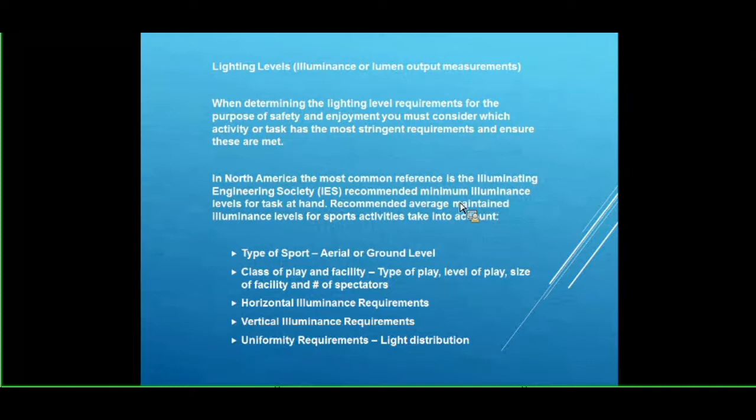My name is Steve Duff. I work with Conrad Lighting Solutions for the LAS initiative, and I am a lighting designer.

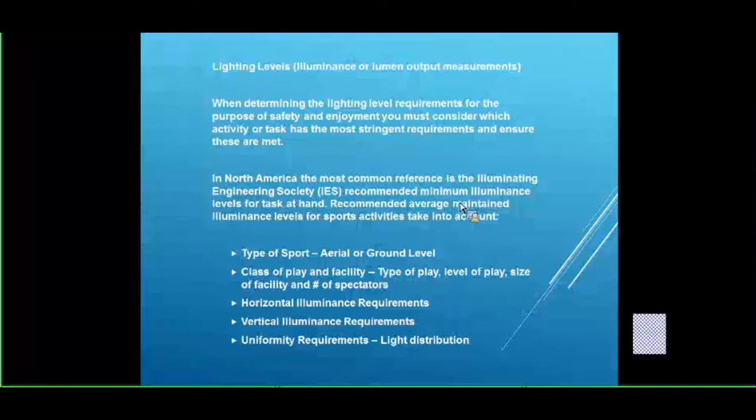What we do is design and optimize a lighting system to produce lighting levels appropriate for the task at hand. When we design light levels for the task, we look at the lighting level requirements, whether on the ground, at a certain height, or on a vertical surface, and determine if it meets the needs for safety and enjoyment required, ensuring stringent requirements are met by producing simulations ahead of time.

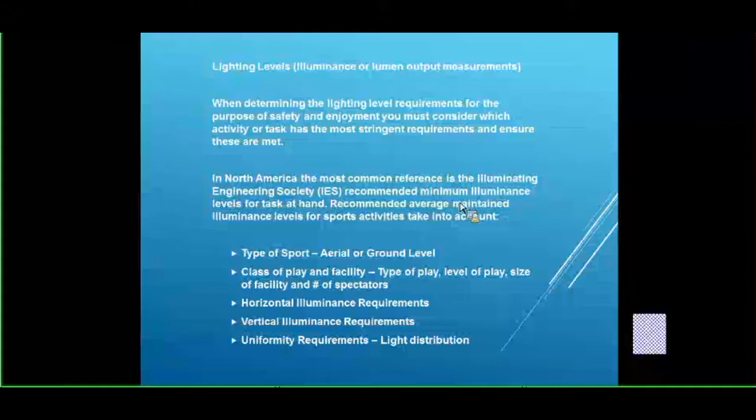When we look at standards for lighting, there are many different standards, but one of the most common references is the recommended minimum illuminance levels from the Illuminating Engineering Society. The IES produces documentation with recommendations for all sorts of different applications—it could be an arena, an office space, or a mine.

There are virtually thousands of different spaces that the IES has conducted studies on to determine the appropriate recommended levels. We work with you on a number of different facilities, as Scott talked about—fire halls, pools—but we're really going to concentrate today on sport and hockey.

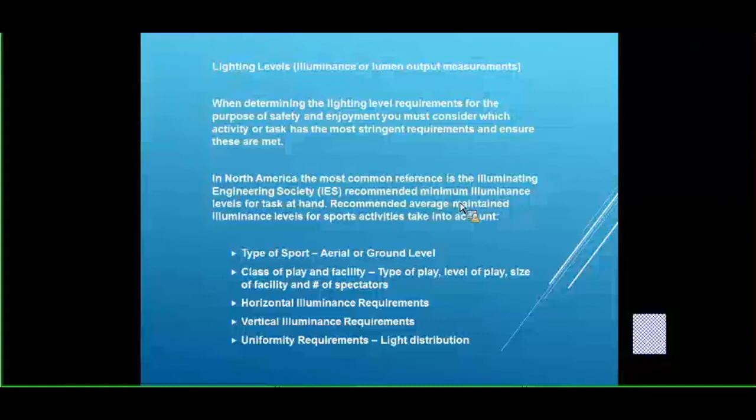When we look at sport, we have to see if it's an aerial or ground level type application. We look at the class of play and the facility—what is the type of play, the level of play, the size of the facility, and the number of spectators. We look at horizontal illuminance requirements, vertical illuminance, and uniformity requirements, light distribution.

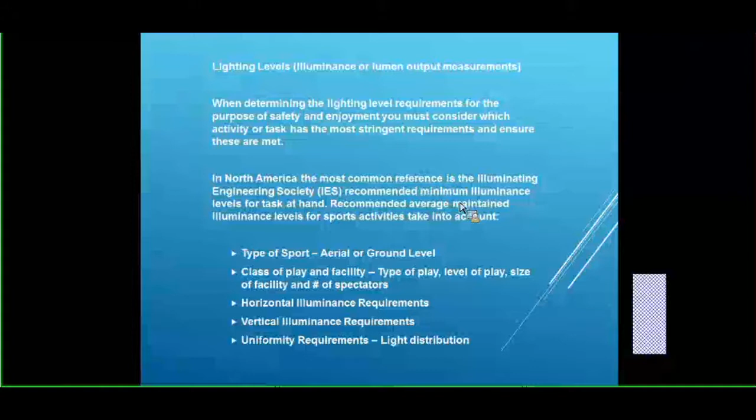That's very important, and we're going to get into that quite a bit, because in some applications the uniformity—the dark spots and light spots of the light produced—are not as critical as in other applications, and certainly in sport this is critical.

So for this discussion, we're going to review the process for hockey. Basically we are determining illuminance falling on the horizontal target, where the players are playing, and also the vertical targets—how are we seeing the players, how are we seeing the net, how are we seeing the board. Then we'll talk further about how we see the entire room, later on.

In photometry, illuminance is the total luminous flux incident on a surface per unit area. It's a measure of how much the incident light illuminates the surface, wavelength weighted by the luminosity function to correlate with human brightness perception. Essentially, that means the amount of light falling on a given area, and that's what we calculate.

In ice hockey, maintained illuminance targets, foot candles or lux, is the average in a given space. We're not looking at the light that is installed and what the levels are immediately—we're looking at light later on in the operating cycle. It could be 10,000, 20,000, or 50,000 hours, but what is the light giving you after time? Because we need to meet these levels over time, not just immediately, so we can meet the requirements of play.

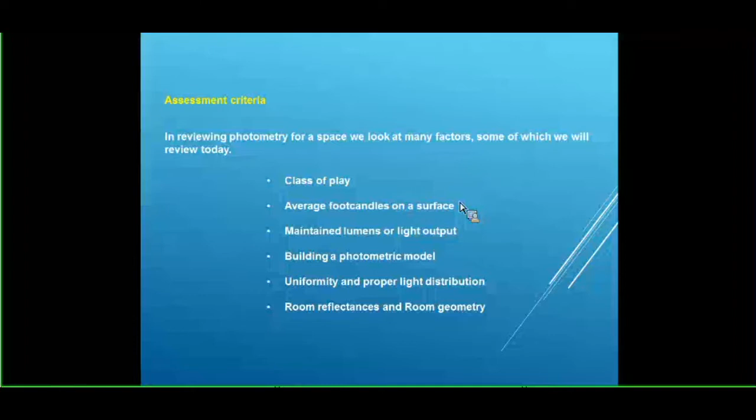In reviewing photometry, we look at many factors, and some we're going to review today. There are thousands of factors we review when designing a lighting system, but we'll cover class of play, average foot candles on a surface, maintained lumens or light output, building a photometric model, uniformity and proper light distribution, room reflectances, and room geometry.

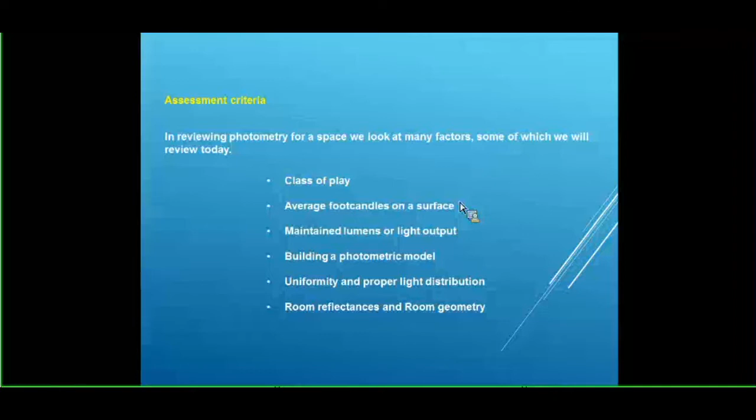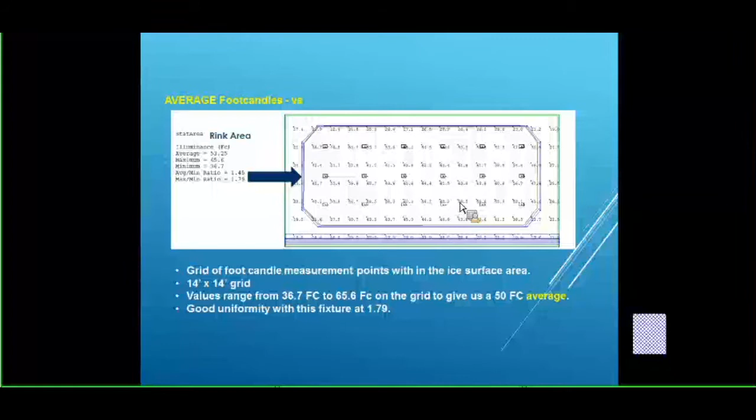So here you see the ice rink. Please ignore the top line foot candle values because it's actually hitting the boards and it's skewed incorrectly, but on the ice surface, underneath one fixture you have 65 foot candles, and under another fixture you have 36 foot candles. So if you measure under one point, 65 foot candles, it doesn't mean that you have a 50-foot candle average.

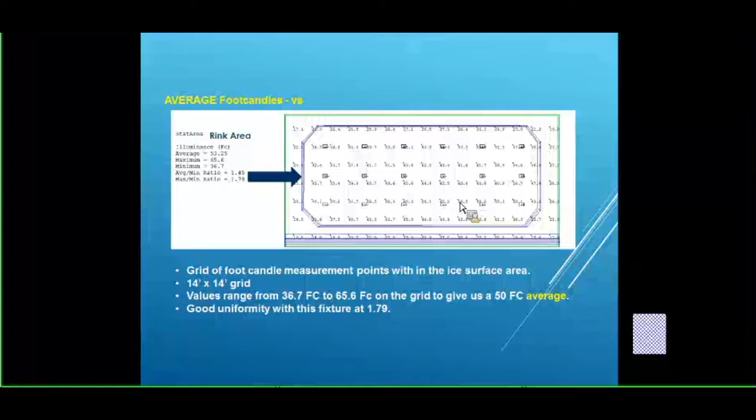That is recommended by the IES. So if someone is working with you and measuring one point to say, hey, I've got you 60 foot candles here, you need to ask, but what is my average over the entire rink? This is what we're designing to. This is why we look at the number of fixtures, the increased number of placements, and where we're putting the fixtures among multiple fixtures to produce this value.

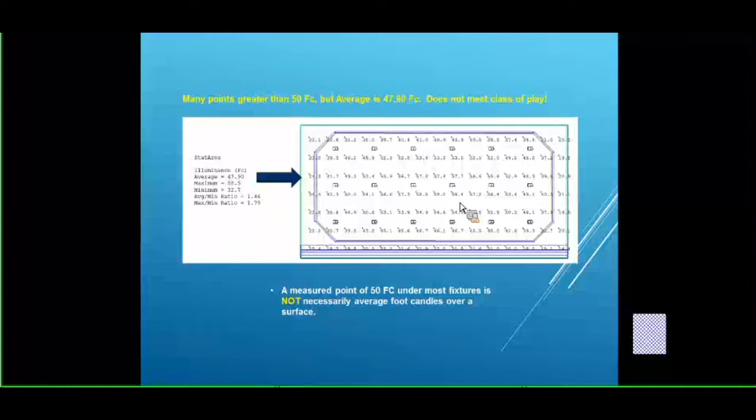Because if you look at this next chart, here we have measured points underneath the center fixtures. That gives you 58 foot candles. But if you look at the average of this particular system in this room that we created, it's only giving you 47.9 foot candles. So you just need to think about that when you're looking at and comparing systems.

Another subject we talked about was maintained lumens, or light output over time. So when we design to target 50-foot candles average, we design over time. We don't look at the lighting system and what it's going to produce when it's installed at the get-go. We look at it over time, depending on the system we're using, and bring in factors to calculate how the original lighting will deteriorate and target to that deteriorated value.

And what factors are we looking at? Dirt depreciation, the efficiency of the system, the lamp or LED depreciation. Lamps, LEDs, sometimes people say they're like rock stars. They never die, they just fade away. And that's the case with LED systems. Some systems deteriorate more rapidly than others.

So as an example, a metal halide system, your HID system, after 20,000 hours, you could have deterioration up to 50% of the original light value. And that's what you need to design to. When we design and look at a simulation of your current system, we're not looking at the light levels you get when you first put the lamps in. We look at the light levels you're going to get at 10, 15, 20,000 hours.

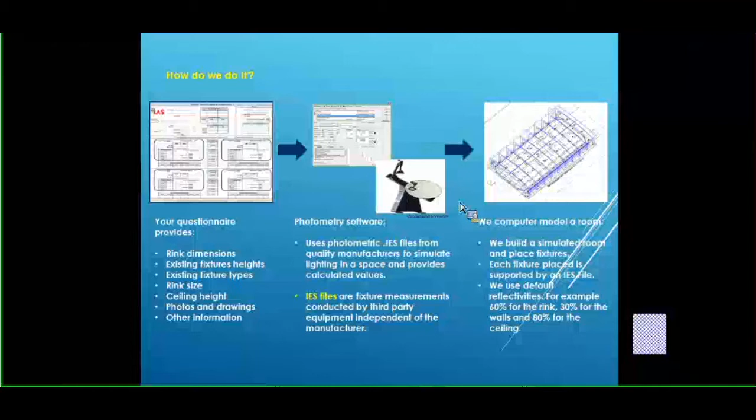Each quality fixture has something called an IES file, a .IES file. What that is, from quality manufacturers, is a way to simulate lighting in a space and provide calculated values for the fixture. The fixture itself is measured on a device you can see in the center screenshot, the lower right-hand corner, a gonio-photometer, which essentially places a fixture and takes measured values in a spherical rotation pattern to create a file that gives you values around different points of the actual fixture. These fixture measurements are conducted by third-party equipment, independent of the manufacturer in most cases.

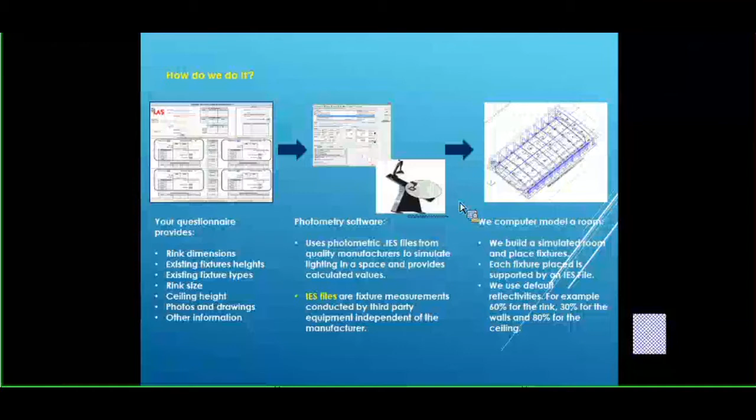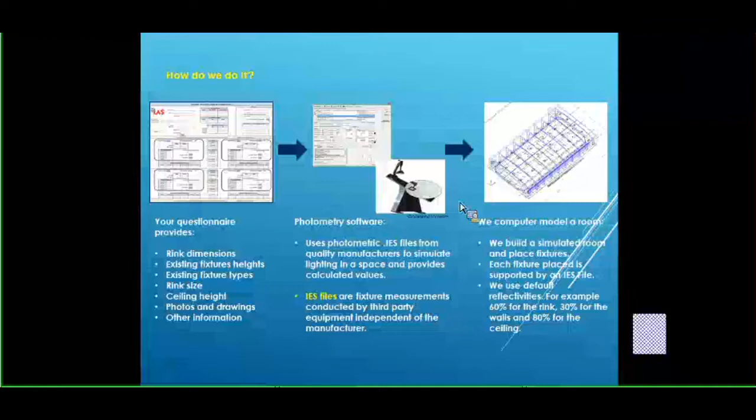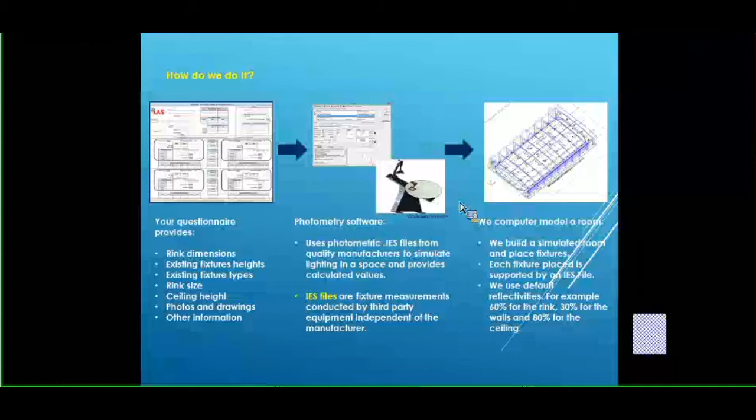So from these files, we computer model a room showing the height, the width of the room, the rink size, and then we start placing IES file supported fixtures into that room at the given height where the fixture is going to be. We then look at reflectivities of the room, and we use a default here because we have to have a standard. We'll talk about reflectivities, but we use a default of 60% for the rink, 30% for the walls, and a higher value for the ceiling because a lot of times ceilings have a reflective surface, so we use that value.

With photometry software and photometric values placed in that simulated room, it allows us to estimate the approximate light levels in an area of reference. For example, we simulate light levels with a typical HID fixture that you may have in your facility. We have a number of IES files on file that allow us to do that, and we take up to a 50% light loss factor to determine what your current lighting system is giving you. Yes, you may have changed your lamps two months ago and your lighting values may be significantly higher, but for the purposes of photometry and what your class of play lighting actually is, you've got to look deeper into the life cycle of the lamp.

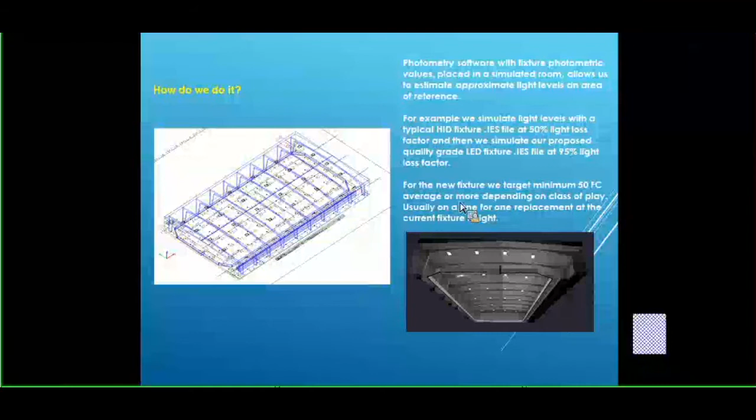Then we simulate our proposed quality grade LED fixture, as an example, with an IES file that may have a 95% light loss factor, or a different factor depending on the fixture we are looking at. For the new fixture, we target a minimum of 50 foot candles average or more, depending on class of play. Even before seeing your space, we can start building simulations of what the lighting will look like in render mode, and get calculations on that point-by-point grid over the surface area of the ice that we talked about before. So we talked as well about uniformity.

Uniformity targets are key for demanding visual tasks such as hockey, swimming, and maintenance areas. So here we have 3 different designs to show you an example. On the left, we have 18 1,000 watt metal halide lamps.

In the center, we have 18 narrow distribution LED fixtures with no lens. These lower grade fixtures have an L70 lumen maintenance, so over let's say 50,000 hours, it might have 70% of its original light output from the fixture. And then on the right hand, we have 18 wide distribution LED system fixtures with a lens, L95.

So let's look at the values below. On the HID metal halide system on the left, we get average foot candles, in this case 60.55 at L50. It could be anything, this is just what we simulated. We have a min-max of 43 to 72 foot candles, which is a uniformity of 1.4. That's pretty good, there's no reason why you can't have a good uniform HID system, especially when you have more placements. And the wattage is 19 kilowatts, quite high to operate your system.

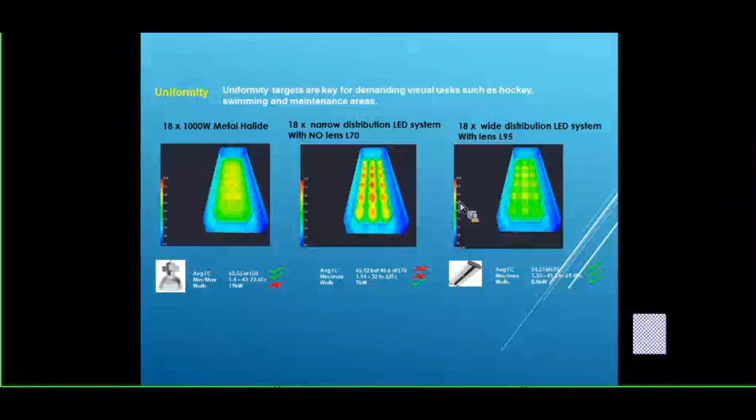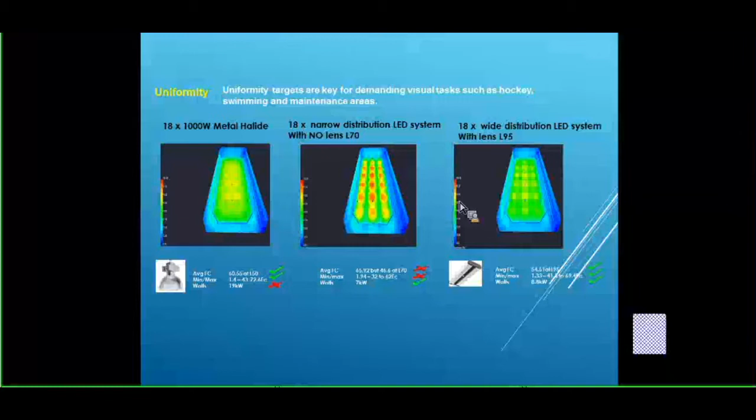The center ice that we're looking at, I don't like to use the word cave, but that's sometimes how people refer to it, is that it's a cave effect. And in the case of the wide distribution, the aisles are lit up nicer, more even distribution. And while the wattage savings in this case is not as great, you're still saving a significant amount of wattage, and you have much more satisfied customers at the end of the day.

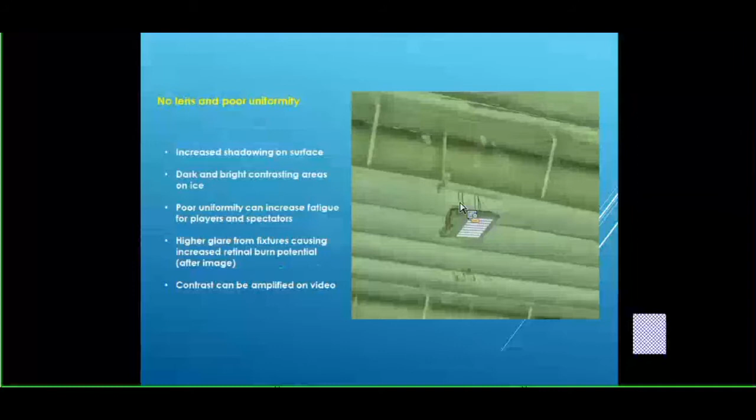So you got to be very careful when you're looking at different fixtures. If you're not using correct optics on the fixture, you can increase your shadowing on the surface. You can have dark and bright contrasting areas on the ice. When you have poor uniformity on the ice, a lot of light and dark, it can increase fatigue for players, and also for spectators, when they're looking at the sport, they can experience increased fatigue.

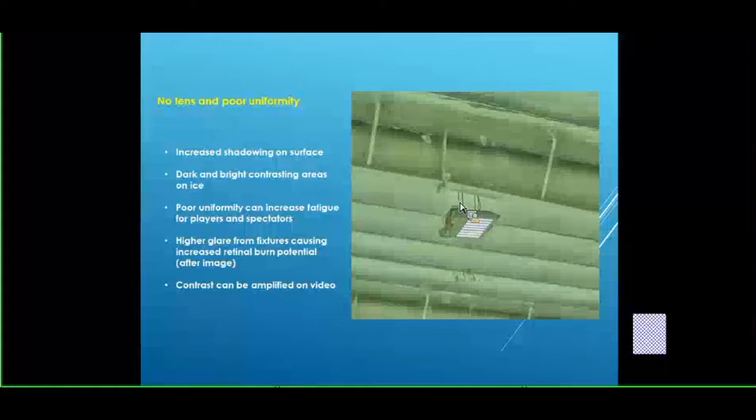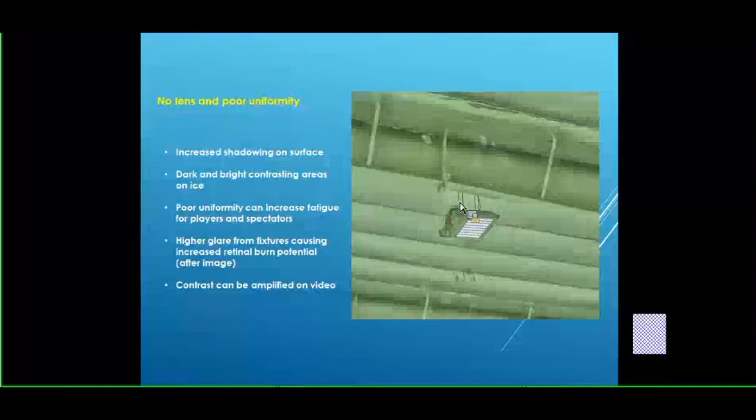And when you don't have good optics and lensing on your fixtures, when you look up at the fixture, it can increase the potential for retinal burn, essentially an after image. And those contrasts can certainly be amplified under video and television.

So some other things that we want to consider in photometry in our design. We've laid out the different fixtures in our room, and this is where we really need to eventually get into your facility and really look at the attributes of the space. The room cavity is critical.

So if you look at the top line on the left-hand side, here we have a space, equal width and length, that has a ceiling that is flat over the fixture placements that are at a particular height. So with the flat ceiling, with the light coming down, even though it's coming down, that light's bouncing all over the place. And then it eventually hits the ceiling, and that ceiling is closer to the ice surface than another design, and that also lends itself to the light on the surface play area.

So let's say we take that same system, and with it we put over it a vaulted ceiling. That light now that's reflected off the ice surface going back up to the ceiling has further to travel to then come back down to the ice. And what happens when you have that vaulted ceiling? You have a lower foot candle average. In this particular case, with the same fixture, left screen to right screen, with just a vaulted ceiling, our simulation gave us 12 less foot candles. So it's something to consider when you're designing your space.

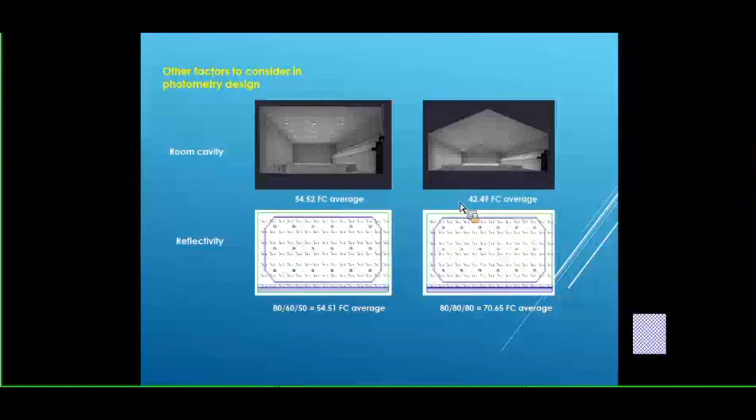Same fixtures and same room geometry, same everything, but different colors. Here we simulated very high reflective surfaces of 80, 80, 80 throughout. And look at what that does to the foot candle average for your space.

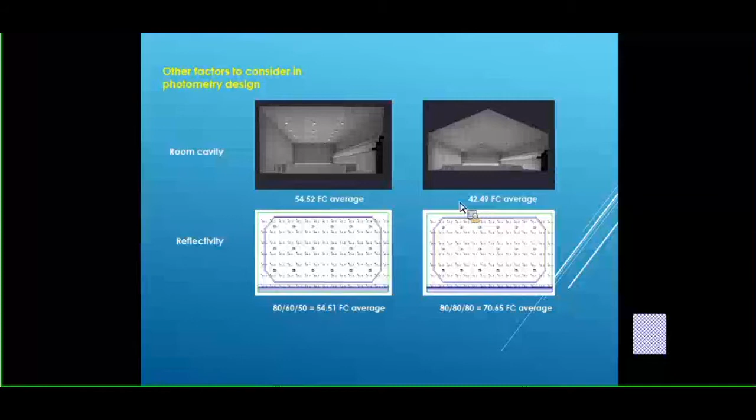So here we talked about what we can do just from a questionnaire and some photos and drawings that were provided.

When we're able to work with you to work out an arrangement to come and visit your site, there's a lot more information that we look at to fine-tune the results in the design.

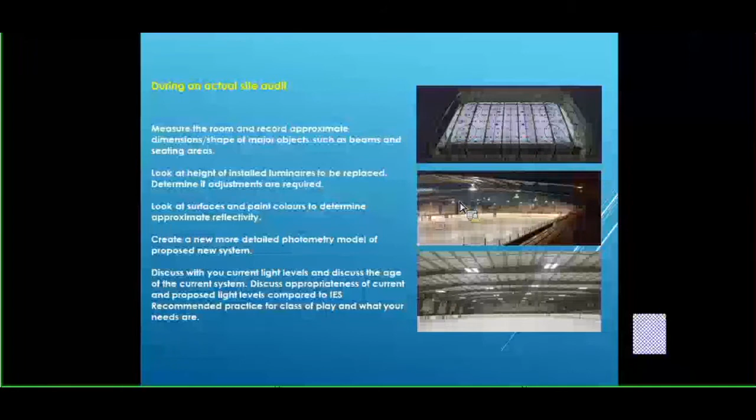We measure the room and record approximate dimensions, the shapes of major objects such as beams and the seating area. We look at the height of the installed luminaires to be replaced and determine if adjustments are required and can be made. If we can get the fixture a little bit lower without upsetting the view of spectators, we'll look at that to increase the energy saving potential of the space.

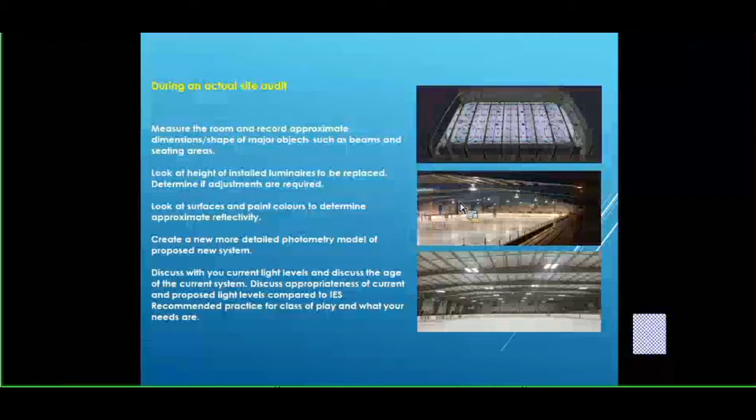We look at surfaces and paint colors to determine approximate reflectivity, and we then create a more detailed photometry model of a proposed new system. In the upper right hand picture, that's actually a model we created for Mapleton, which is the case study we're going to briefly discuss today.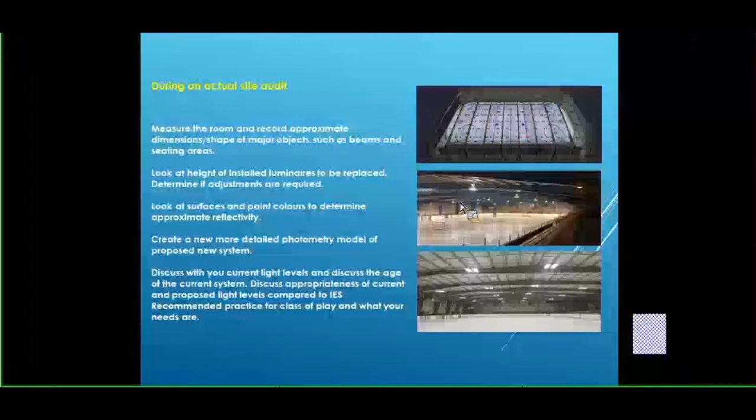What's most important is that we discuss with you your current light levels, the age of the current system, and the appropriateness of current and proposed light levels compared to IES recommended practice for the class of play and what your needs are.

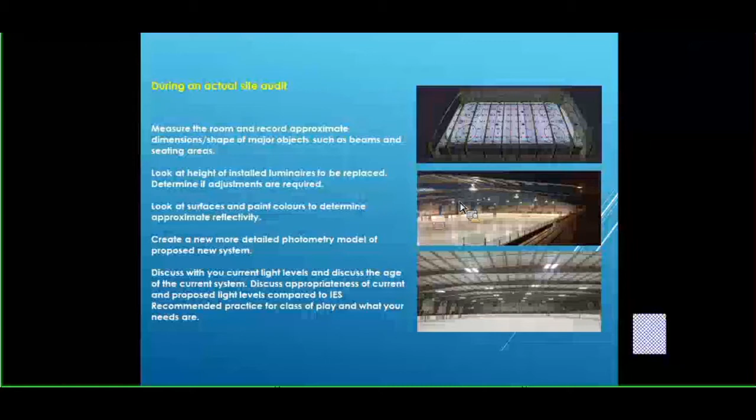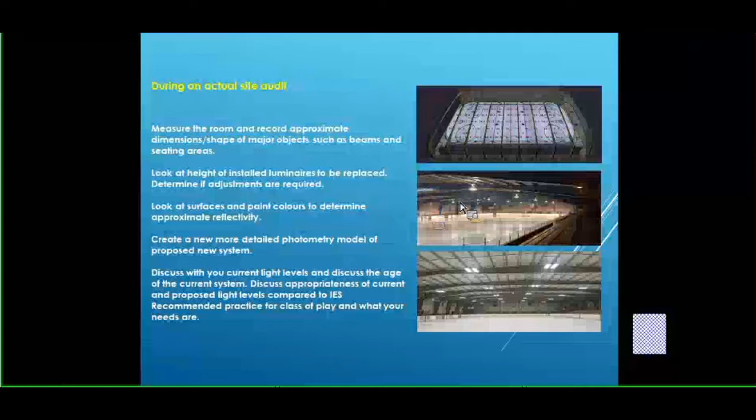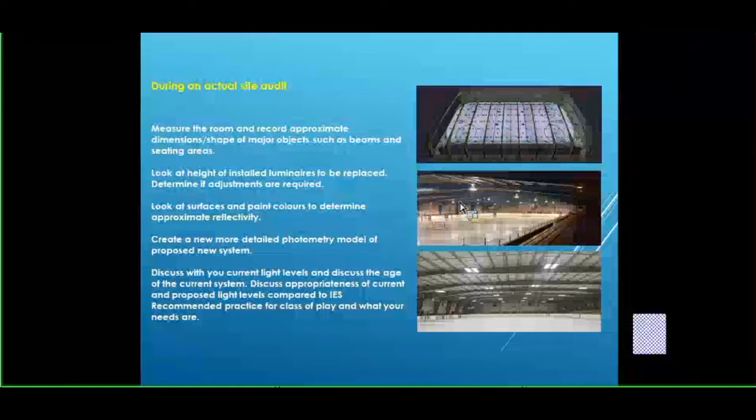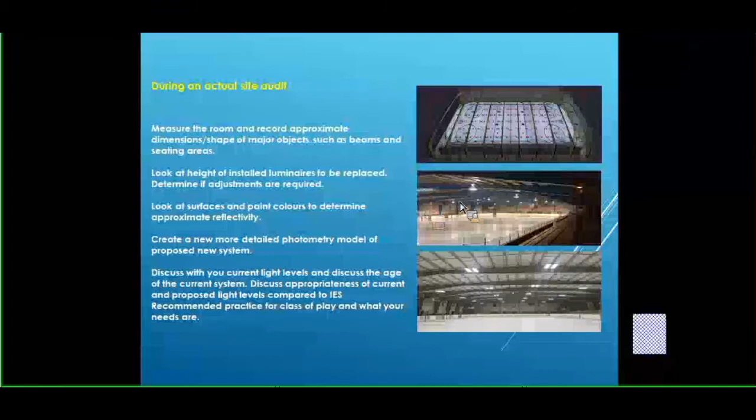Maybe you want a system that meets the class of play, but you may want to be at a higher level than that. You may have had an HID system, a brand new relamp system, with light levels of, let's say, 65 foot candles. You don't need that for your class of play, but you may like that — your spectators may like that. That's maybe something you want, and we can then talk to you about designing a lighting system that can work to estimate bringing you to those values.

So when you're looking at having a new lighting system proposed, there's a number of questions that you may want to ask.

What is the average foot candles over the ice surface? Not what foot candles this one center fixture gives me, but what is the expected uniformity ratio over the entire surface? Am I going to have hot spots higher than I would want? Will my fixture have lensing to improve uniformity and help mitigate glare?

Has the proposed new lighting system accounted for light depreciation factors over time? Has what's been proposed been what you get out of the box, or what you get after 10, 20,000 hours?

Has a lighting system been designed for our class of play and our task at hand? If you're in a hockey rink, it's one level of light. If you have a maintenance bay for your trucks, it may be a different level of light you're looking at.

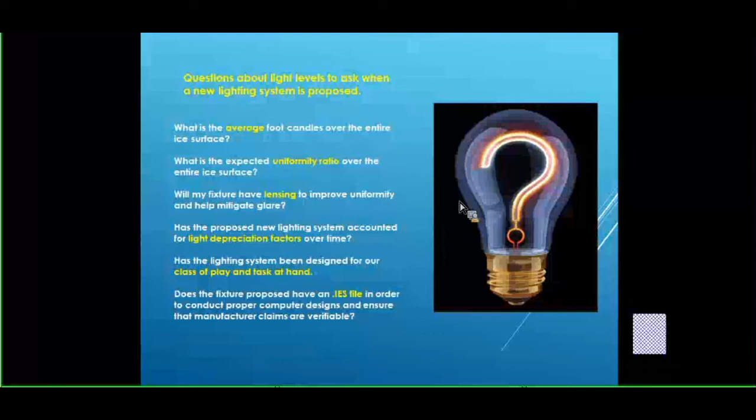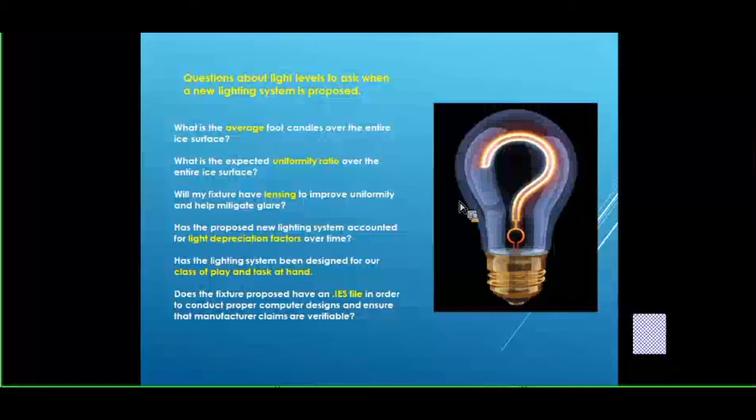Does the proposed fixture have an IES file in order to conduct proper computer designs and ensure manufacturer claims are verifiable? There are a lot of very good manufacturers in the market with excellent specification sheets, but we want to verify that with proper photometry from a third party.

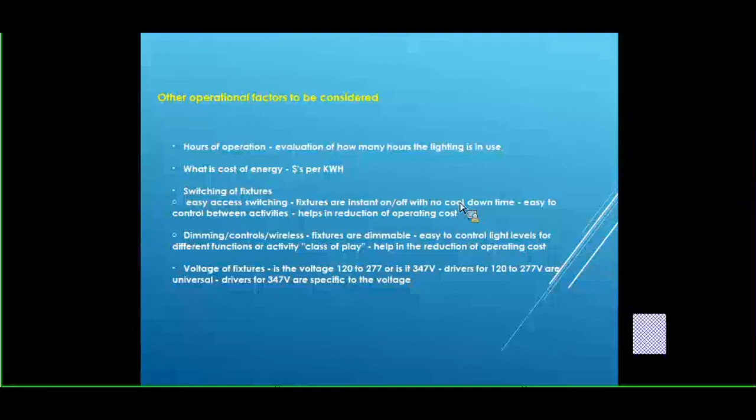So that is photometry, and photometry and lighting design go hand in hand with the strategy of having the most efficient and energy efficient lighting system appropriate for your task, while at the same time providing quality light and keeping spectators and players happy.

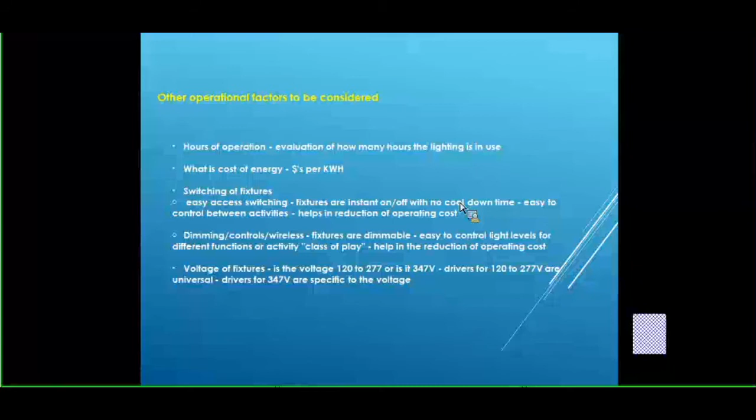So what else do we look at in our assessment when we sit down and look at your needs? We look at the hours of operation, how many hours of lighting is in use, your cost for energy, cost of energy over time, peak periods, etc.

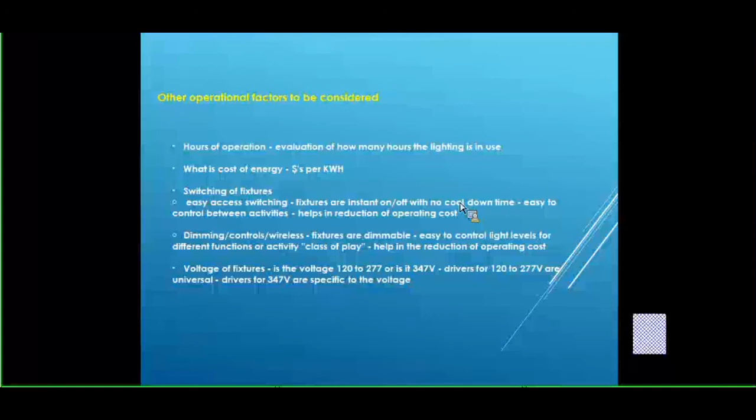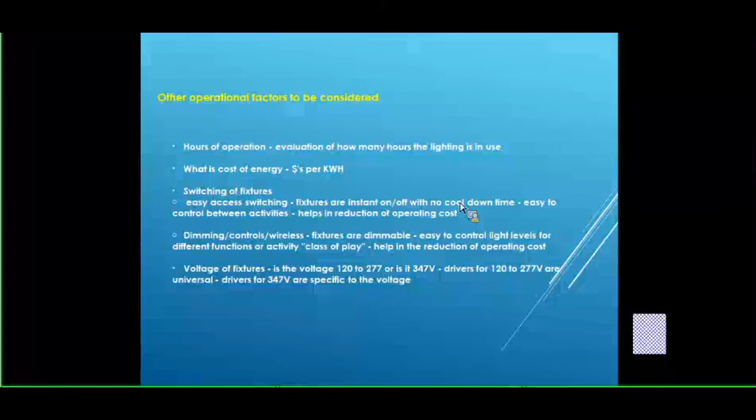We look at the switching of fixtures, the easy access switching, and one great advantage with LED is the instant on-off design of fixtures with controls, where if you have a special event you can turn them off when need be, and you can also dim with certain controls.

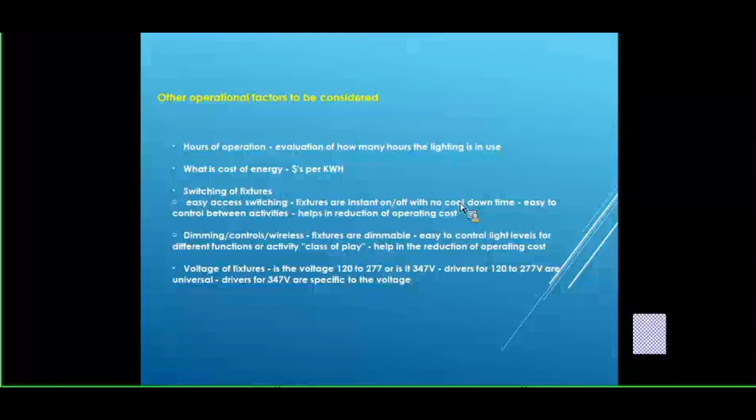The next webinar will get very deep into controls, dimming, and wireless dimming. With LEDs, it's amazing what can be done, and with controls there is further energy savings to definitely be had.

Another factor we all need to look at when assessing a quality LED manufacturer is the product and the warranty that supports the product. You have to look at the different levels of warranty being supported - it looks at the LED modules, the LED driver, and the body itself, and these can sometimes be treated as separate elements of the warranty.

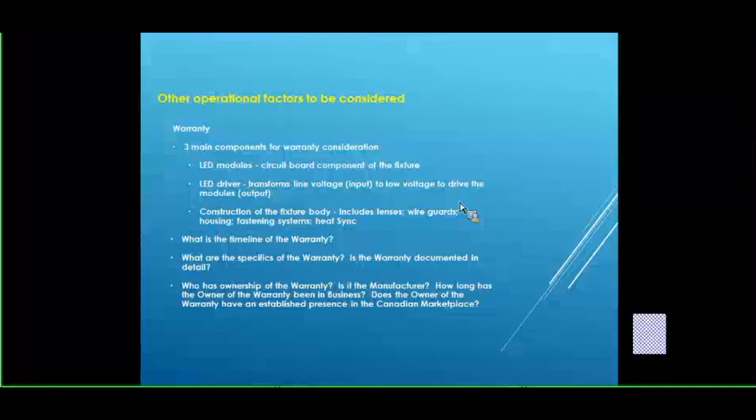With the different elements of the warranty, you look at the timeline of all those elements. We definitely want you to understand that warranty, and ultimately you need to understand who has ownership of the warranty - is it the manufacturer? A lot of times it is.

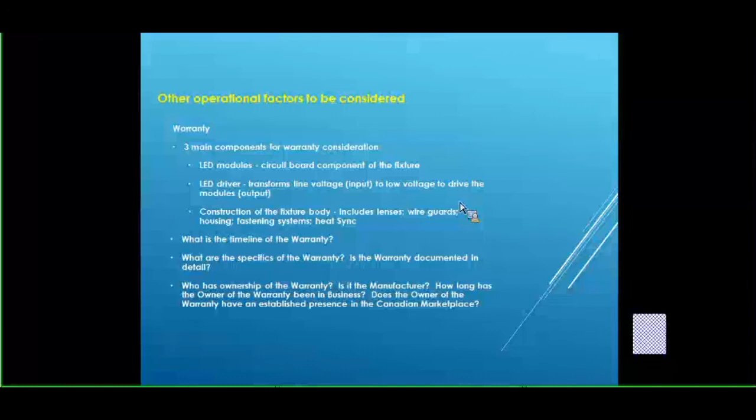You have to look at how long that manufacturer has been in business. Are they going to be around for the long term to support the product? And does the owner have a warranty with an established presence in the Canadian market to support that warranty?

So we're just going to jump right into the case study in the interest of time. Thanks, Steve - I'll throw it over to you to walk through the Mapleton case study again. Okay, yeah, we'll briefly look at Mapleton.

They had an existing system with 18 fixture placements with a mixture of HID and some fluorescent, 2,000 hours of operation, a 347 volt system with a mounting height of 22 feet. We estimated that their model light levels were modeled at 50 to 55 foot candles.

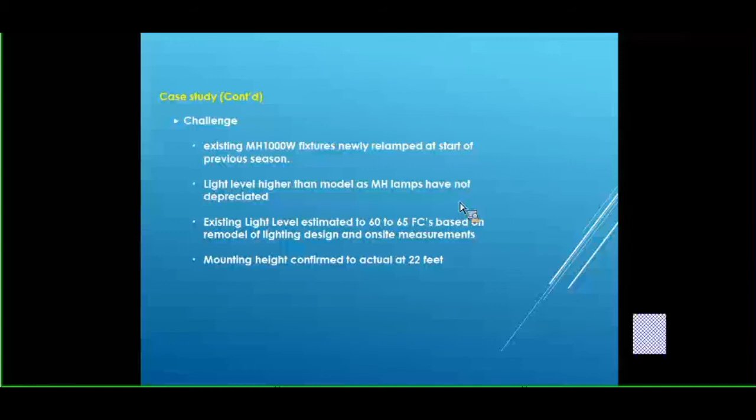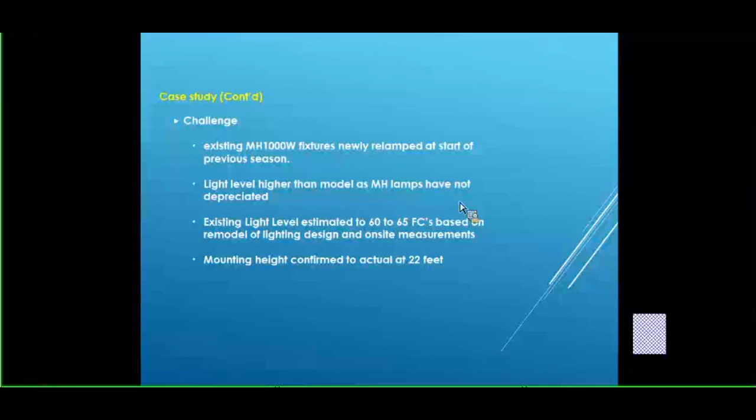The challenge in this particular case was that when we went in there, the existing metal halide fixtures were newly relamped at the start of the previous season, so the light levels were higher than what we had actually modeled.

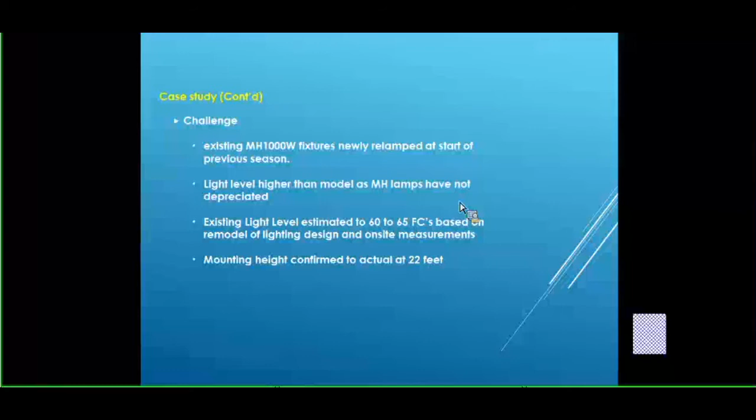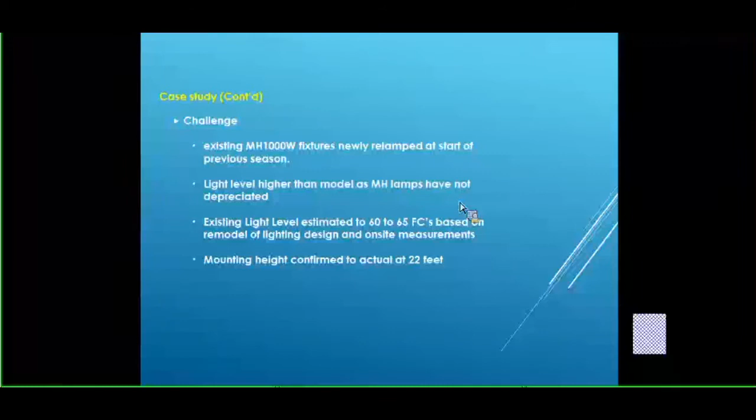Which means they had an existing light level at that time of 60 to 65 foot candles, and we modeled for a lesser value because we accounted for the depreciation of the actual lamp. We confirmed the height at 22 feet.

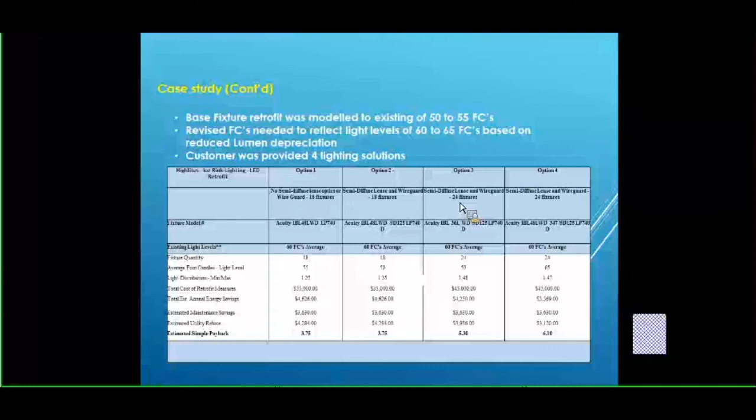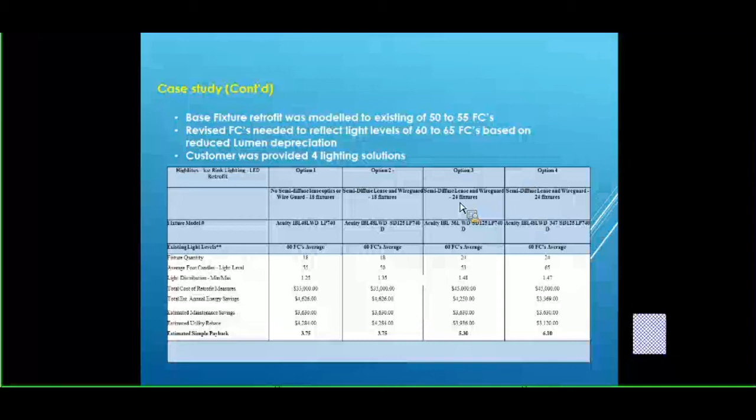So what we had proposed originally was a model of 50 to 55 foot candles, but the management wanted to have a light level that the players, the spectators, and the management wanted to have, which was the fresh relamp level in that space.

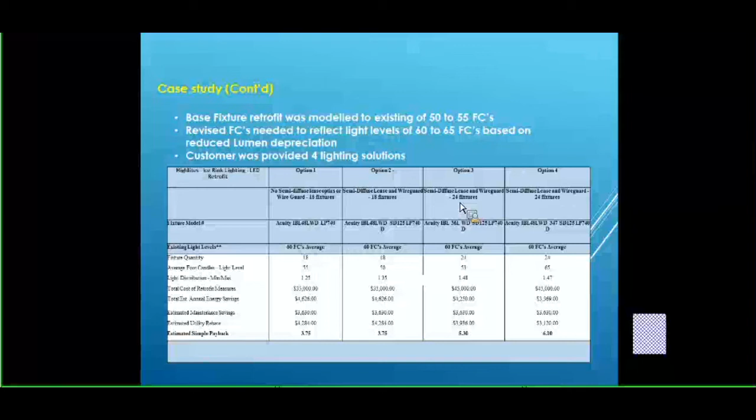So what Conrad Lighting Solutions did was provide the customer, based on being able to do an investment grade audit, was to provide 4 different scenarios that we actually modeled for the customer. I won't get into the specifics, but we have different paybacks - the payback with fewer fixtures was 3.75 years, producing a light level of 50 to 55 foot candles with an LED system.

The customer decided to look at a 24 fixture system - longer payback, but higher foot candles and improved uniformity. So the customer looked at the quality of light, still a very, very good payback, still very, very good energy savings. And these paybacks, like we said before, aren't looking at today, but what the light levels are for the long term.

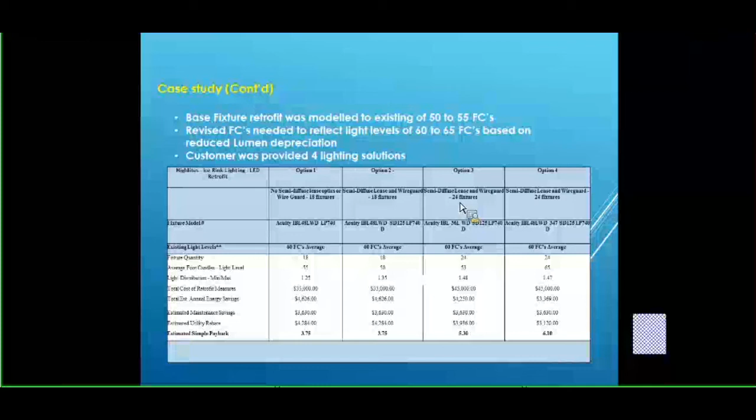So we went from 18 to 24, 48,000 lumen fixtures. We had installed a lighting controller dimming system to allow for switching and further energy savings, so when they don't have hockey and have, let's say, recreational skating, that can be dimmed down and they will realize improved savings.

We went in there after the fact and worked a design to target 65 foot candles, and with our 37 different meter reading points on the ice, we achieved an actual light level average of 65 - very, very close. In lighting design, we put in as many factors as possible - you could put in thousands of factors as an approximation, but we worked to get very, very, very close.

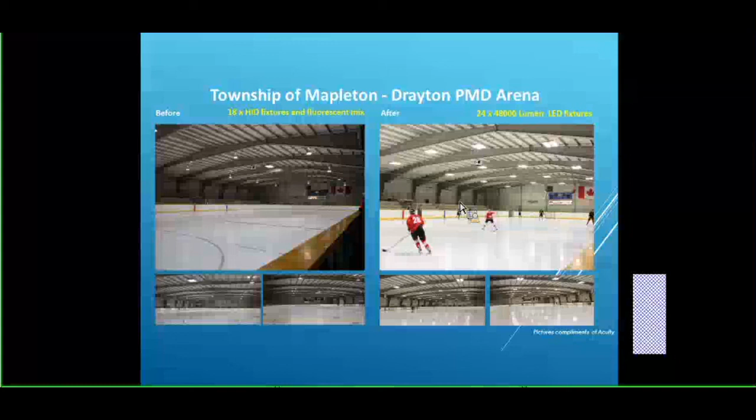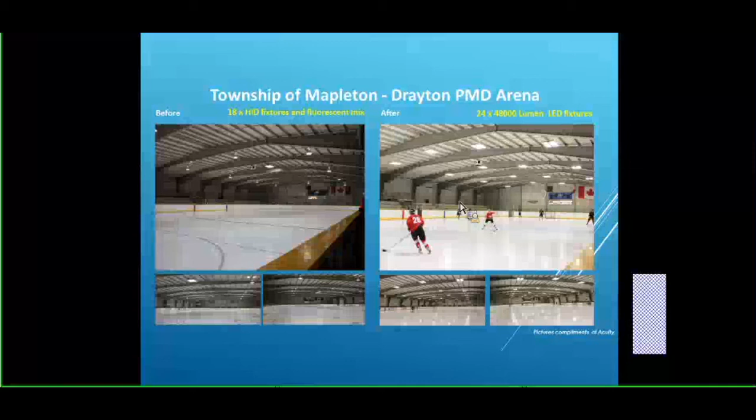We'd like to thank Acuity for the professional photos that they arranged to have taken - they came to visit at Mapleton. They were delighted, we were delighted, LAS was delighted, but most importantly the customer was delighted. And this is our goal at the end of the day.

So for my part, to finalize things, just two thoughts: you must design your lighting system for the future, not for today, and you should design your system for your class of play. So for my part, I'd like to thank you very much, and I'll hand it back over to Scott.